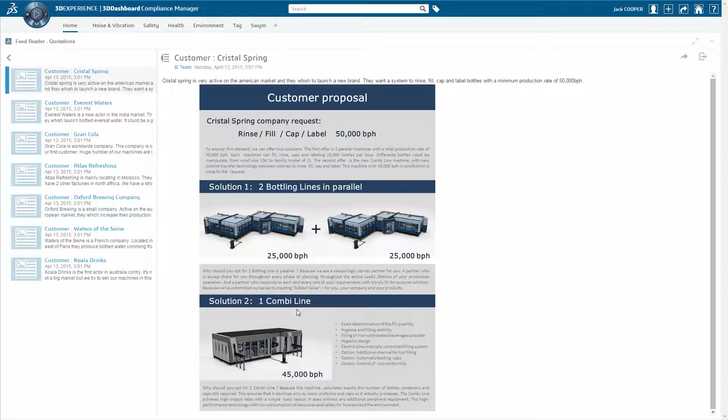Based on his product portfolio, Julien can propose two solutions. The first one is two machines in parallel with a capacity of 25,000 bottles per hour each. The production capacity matches the customer's requirement. The second is only one combi line with a capacity of 45,000 bottles per hour. This solution is very competitive price-wise, but does not exactly meet the customer's requirement.

The question he asks himself is, can he make his offer more competitive by increasing the capacity of the existing combi line by 10% so that it meets the customer's requirement? One click on the compass allows him to display all the ideas currently being studied in his company. This new ideation process is an easy and social way to mature and qualify innovative ideas.

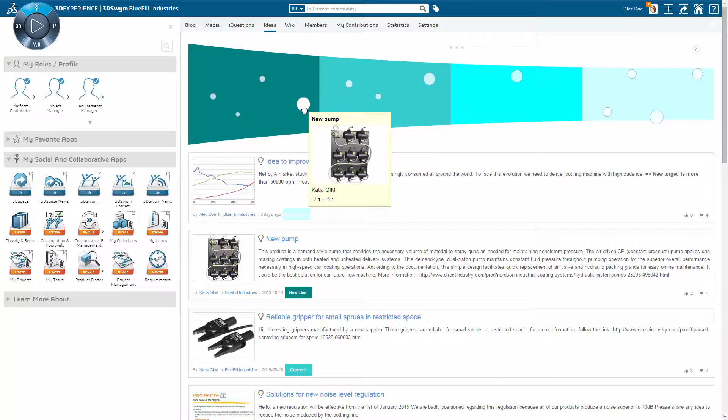All actors can voice their needs and ideas and provide each other with their feedback. And one of them is related to increasing the combi line's production capacity. To ensure that this idea is feasible, he contacts François, the product manager. François, with the help of his design manager, proposes to boost the rotation speed of the carousels to reach 50,000 bottles per hour. But this speed may not be tolerated by all the machine's components. They need to identify the parts that will limit the line's performance.

Julien worries this analysis will take too long and that he won't be able to provide his customer with the best solution. François reassures him that thanks to the 3D Experience platform, he'll receive a response upon his arrival. Confident, Julien flies off to meet his client. Let's see how the 3D Experience platform brings an innovative way to study and manage design changes.

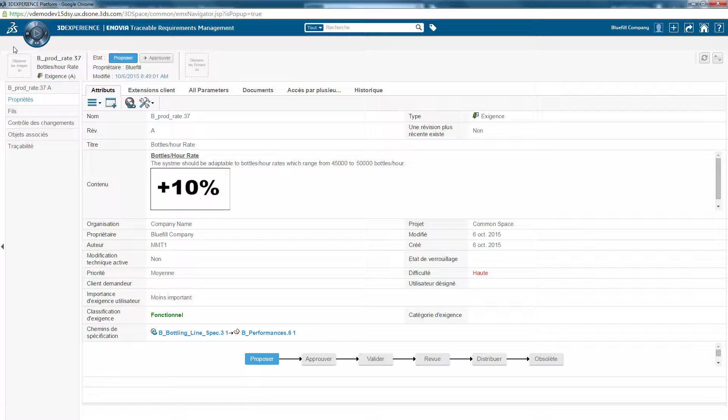We begin with Josephine, responsible for machine design. She retrieves Julien's requirement among all product requirements and starts with a functional analysis. Here we see the definition of the machine's major functions. Each function is designed to satisfy a group of requirements. For example, this function is composed of several sub-functions that represent the different operations the machine must perform: rinse bottles, fill, cap, and label them.

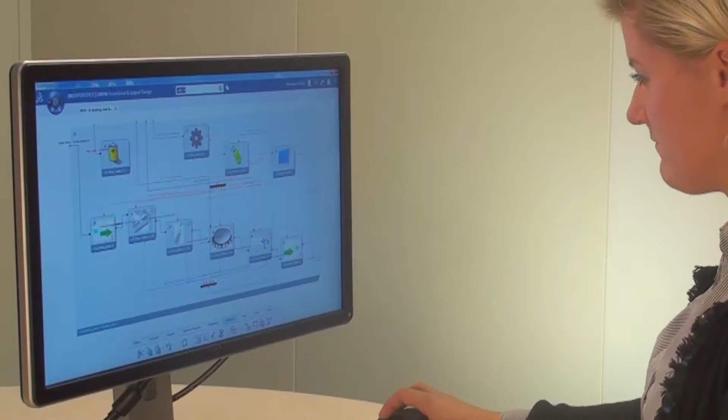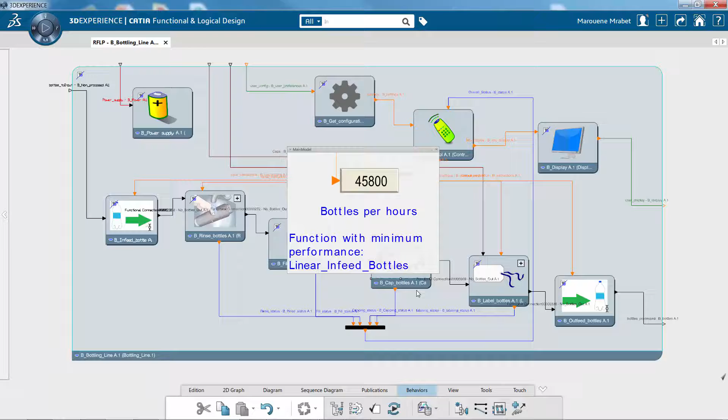Josephine simulates the behavior of all these functions in order to check the theoretical performance of the machine and to understand which system is the most limiting. The result indicates that the function linear in-feed bottles does not allow a pace higher than 45,800 bottles per hour. Josephine will replace this linear bottle handling function with a new one which handles bottles using a rotating mechanism. Thanks to a catalogue of approved functions, she's able to replace this one by another more powerful one.

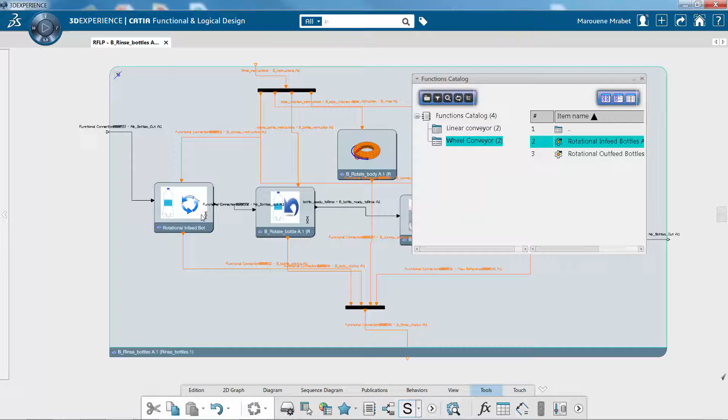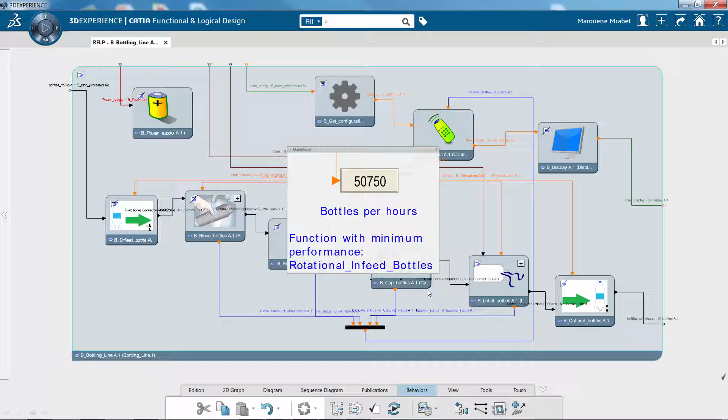She reruns the simulation to see the new machine capacity. The result is above 50,000 bottles per hour, which is in line with the request. Josephine's simulation proves that she could launch the design change for this standard machine. Let's go back a few months when the machine was designed using the 3D Experience platform.

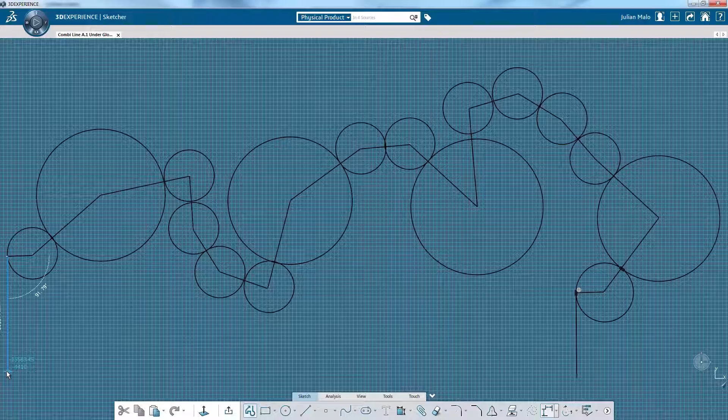It began with Yves, the chief mechanical designer, whose role was to define the layout of the machine. For this project, a new technology for handling bottles was developed. Synchronized wheels instead of conveyor belts between rotaries were used to avoid bottle congestion and to drastically improve performance. As you can see, thanks to an intelligent design, Yves optimized the way the machine rinses, fills, caps and labels bottles. Due to the complexity of this type of product, Yves works in collaboration with his colleagues like Issam.

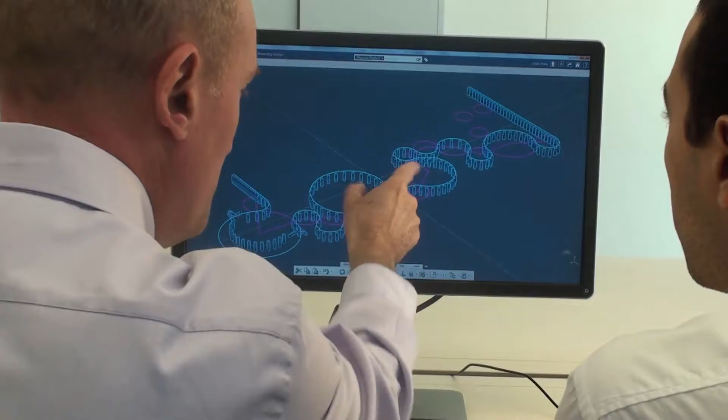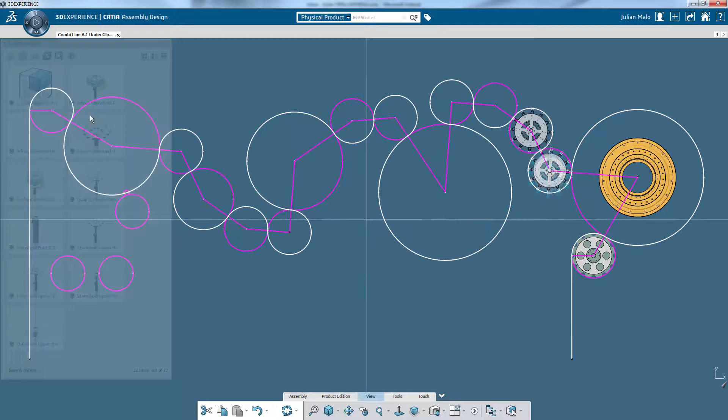They're discussing which parts could be reused. Their modular design approach maximizes reuse of existing parts. Design time is drastically reduced and the quality is improved. Advanced research tools simplify the retrieval of components. They're positioned by dragging and dropping them on the previously defined skeleton. In parallel, Issam works on more specific parts, such as the rinse module, which we see here.

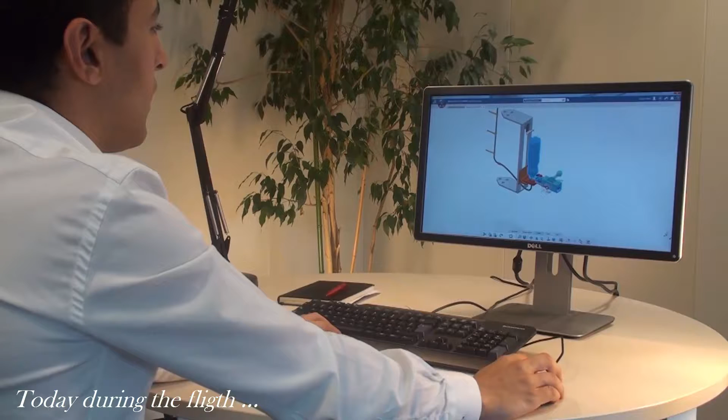By working concurrently on the same 3D digital mock-up, they were able to create this new combi line. Let's come back to the present now to see how the change requested by Julian will be taken into account. To deal with the higher rotational speed of the rotary, Issam will need to make some adjustments. For instance, he adds a protection on the rinse module to prevent bottles from being ejected during handling.

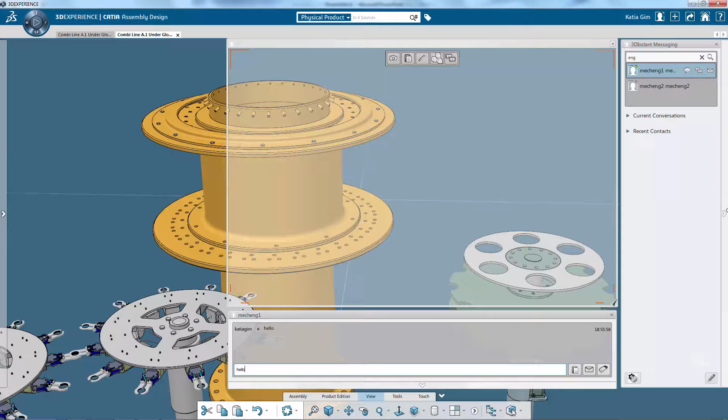In parallel, Yves replaces the linear conveyor module by a rotational wheel module. By chatting in his working session, Issam informs Yves that the new rinse module is now available. Thanks to the 3D Experience platform, they're able to share their data and share more details over the phone. Issam manipulates the model remotely. Yves understands the behavior and verifies the kinematics in the context of the adjacent modules.

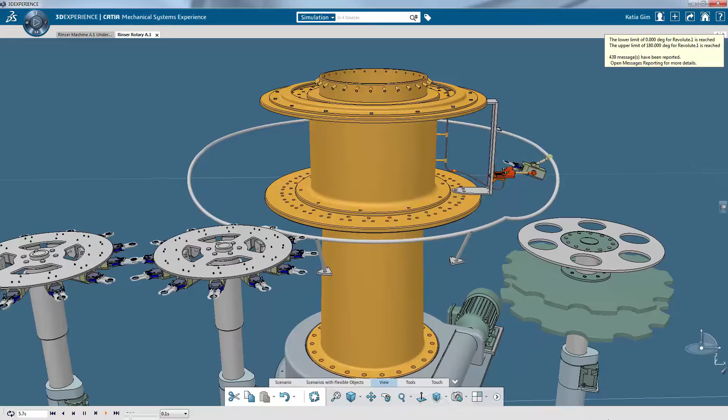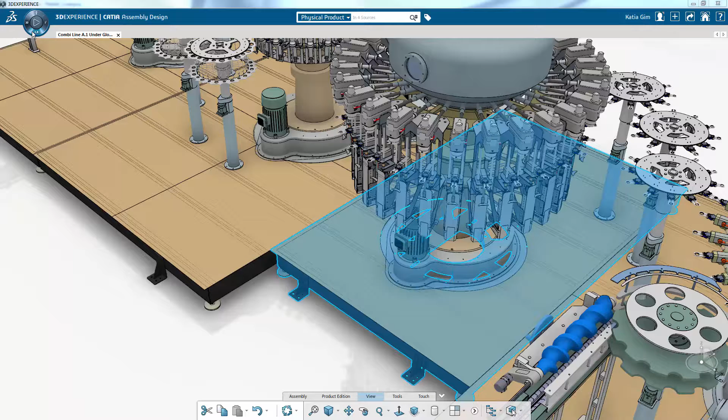The design change is therefore done with a minimum number of operations, and it's now time to validate the behavior of this machine. This is Lening's job, the simulation engineer. His first task is to check that the framework supports the rotary loads under all types of conditions. With the south quadrant of the compass, he accesses the finite element analysis applications and validates that the structure is strong enough. As you can see, there are no boundaries between the engineers and the analysts, as they're all working with the same data.

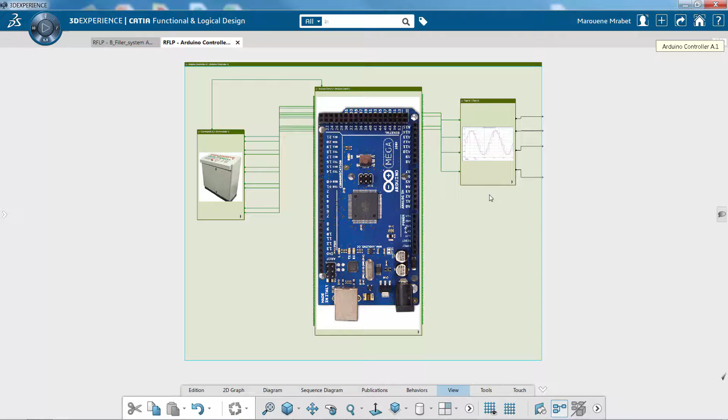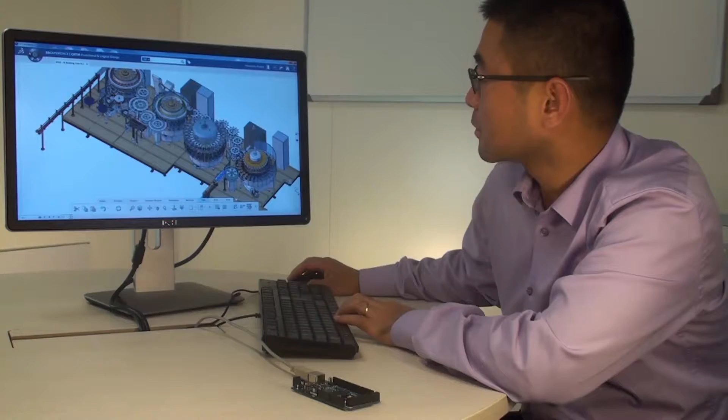Lening must also ensure that all components are well synchronized. The behavior of all hydraulic and electrical devices has been modeled. He can launch the simulation of the controller and verify the result. The real controller of the machine can be connected to the digital mock-up. Lening can thus validate the real behavior on a virtual model, which accelerates validation of the commissioning phase earlier in the development phase. In an immersive environment, the product manager visualizes the machine in real scale and can identify potential malfunctions.

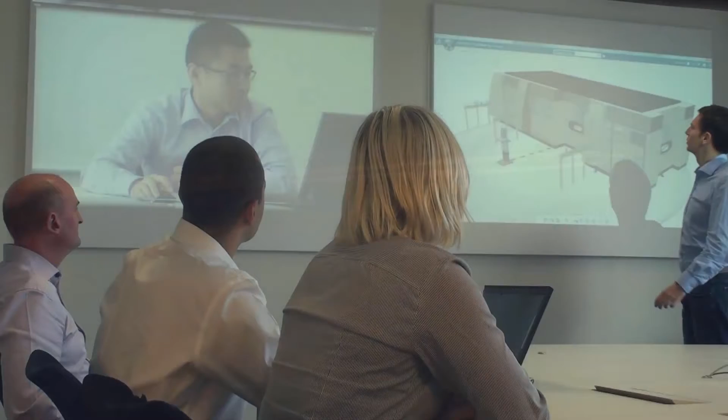In the meantime, Julien is now about to reach his destination. A final design review between all stakeholders will enable them to certify all design changes. Navigating using turntables allows them to visualize in detail all the machine's parts. Lening, who's located in China, can interact in real time with his colleagues from the Paris office. All actors view and understand each detail. Color coding indicates different information, like which parts are reused or not, where the interferences are, or to compare changes. This helps them make the right decisions.

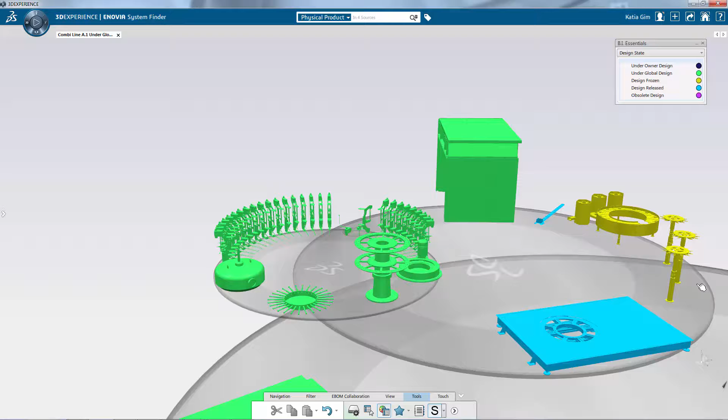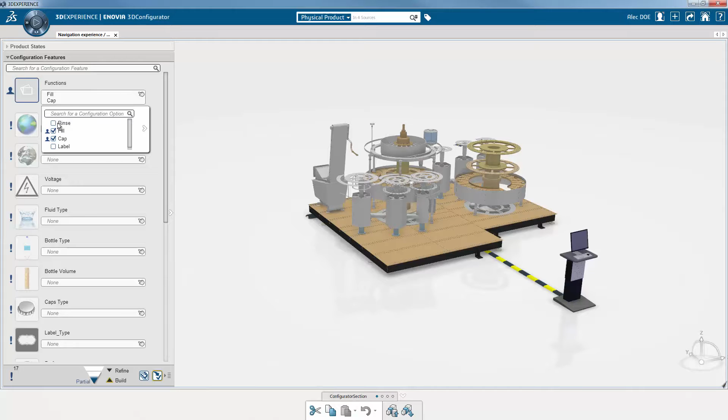Satisfied with their work, they decide to put this new version of the combi line for sale. Julien is notified upon his arrival that he can now propose this new version to his client. Philippe, VP at Crystal Spring, knows exactly what he wants for his new plant. Julien connects to the 3D Experience platform to access his company product portfolio and to directly configure the machine to meet Philippe's expectations. For example, if he wants to fill large 2-liter bottles, the configurator proposes the adequate model for bottle sizes from half a liter up to 2 liters.

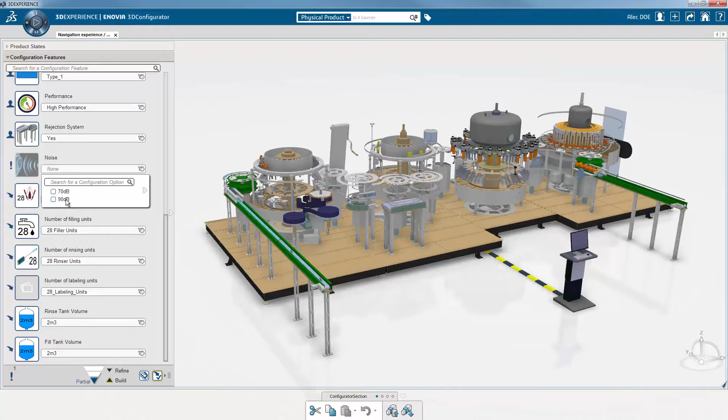Philippe is very impressed, and even more so as he himself can change the options in real time. The discussion between the vendor and buyer is simplified. They're speaking the same language, with 3D to support them during their discussion. Finally, since the configuration meets all the client's requirements, Julien uses realistic rendering to show how the machine will look in Crystal Spring's factory. This instantly triggers a positive emotional response from Philippe, who closes the deal.

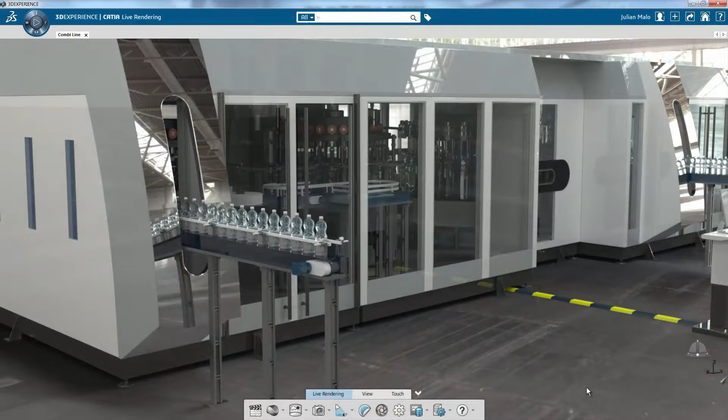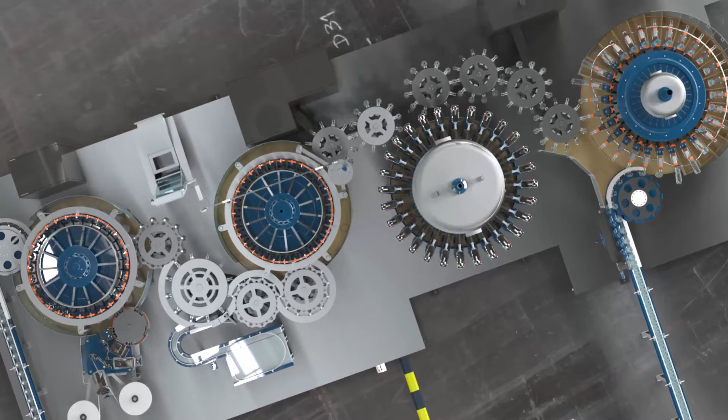In this journey, we've seen how easy it is to do business in the age of experience by connecting all stakeholders of the company, from sales to engineering, and enabling them to collaborate in real time on the 3D Experience platform across the globe. The 3D Experience platform definitely allows you to simplify and accelerate your business.